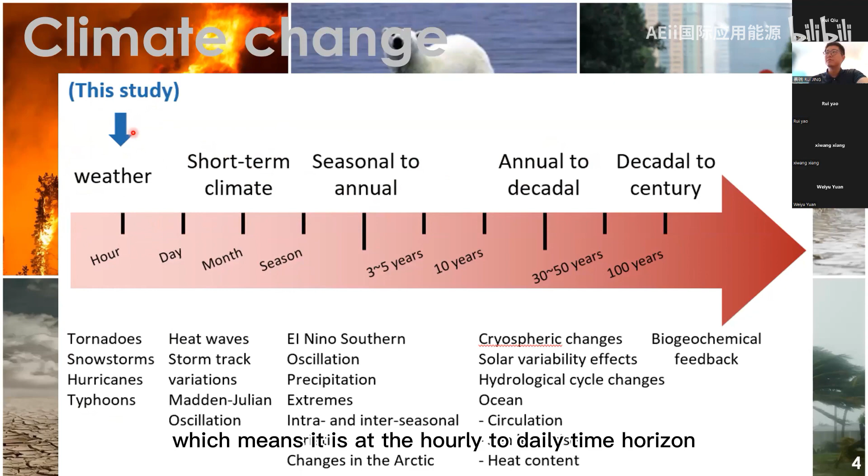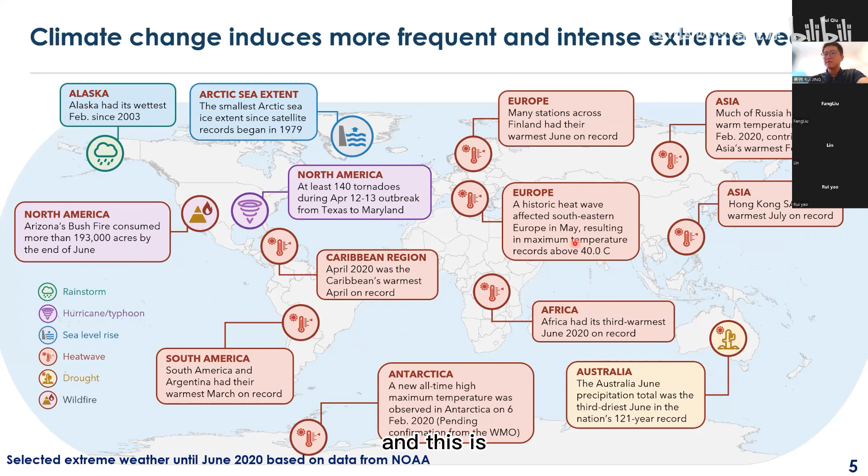Here is a map showing selected extreme weather events in 2020, such as the wildfires in America, hurricanes, the global record-breaking high temperatures, and also the drought in Australia, etc.

This informs us that we need to understand more and plan extreme weather resilient urban energy systems, as more weather-related renewable energy is now in our energy system. If we do not have sufficient knowledge of these events, the system or city operator can only hope that the next extreme weather will not trigger a sudden blackout.

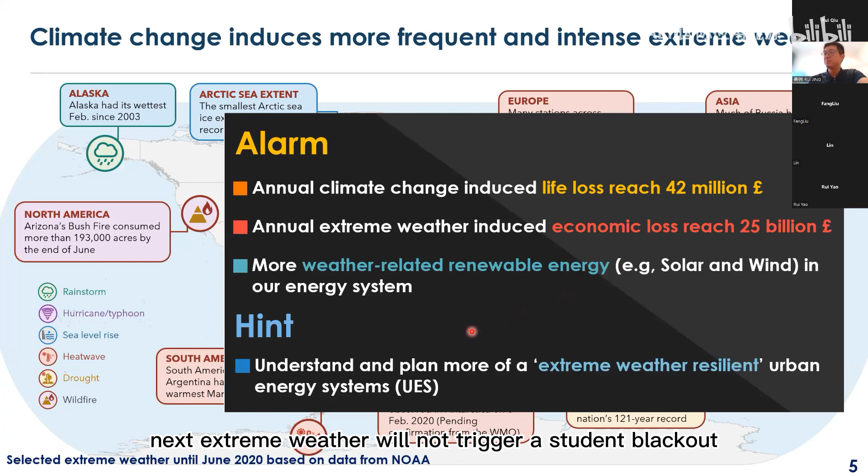Here we consider two types of extreme weather. One is called the grey rhino, such as solar and wind fluctuation. This type of abnormal event is one that decision makers are already aware of, and it is relatively predictable. People also call it a high probability but low impact event, and recent research already considers it quite well.

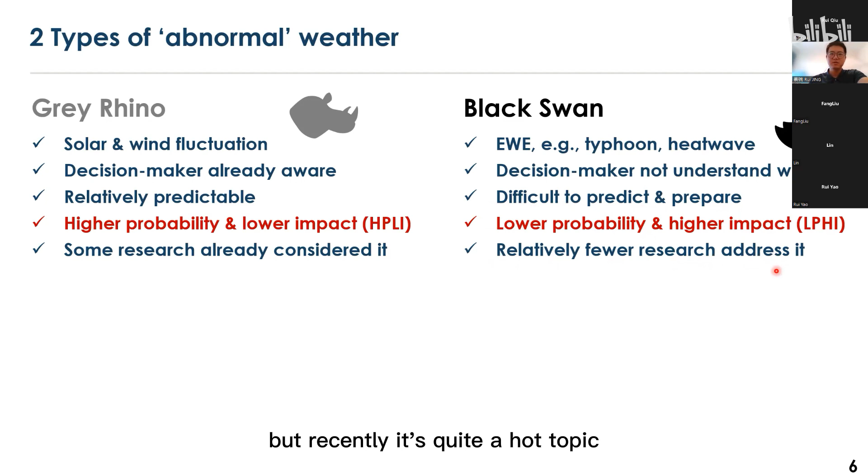Another type of abnormal event is called the black swan event, also known as an extreme weather event, such as typhoons or heat waves. Decision makers usually don't understand it well, and it is relatively difficult to predict or prepare for. People also call it a lower probability but high impact event, and there's relatively little research addressing it, but recently it's become quite a hot topic. So we mainly focus on this type of event in this study.

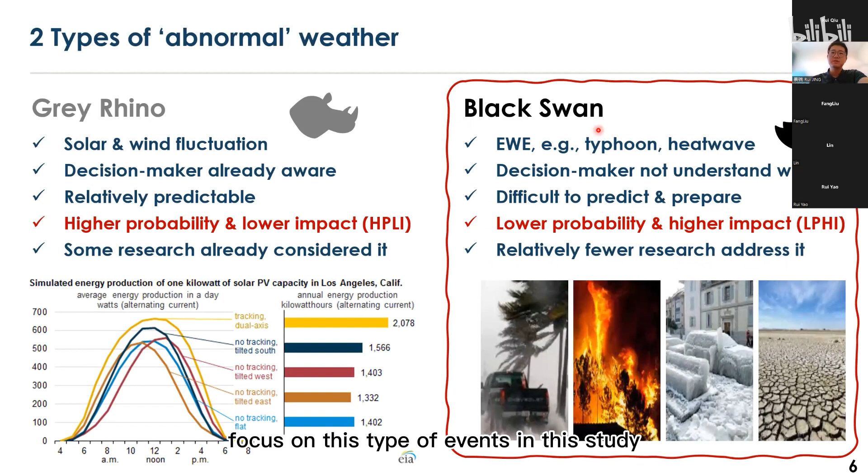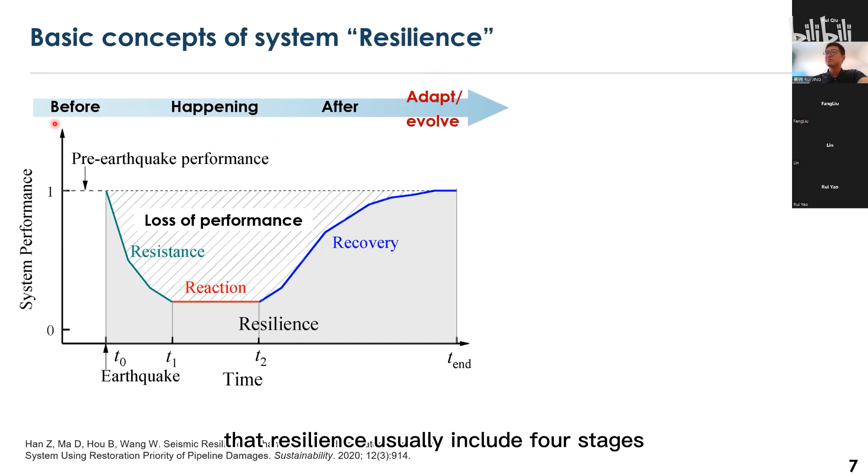Here is a basic concept of system resilience. We may already know the basic concepts of resilience, which usually includes four stages: before, happening, after, and even the adapt/evolve stage.

At the before stage, we usually perform planning and preparation research. When extreme weather happens, the system will absorb, react, and recover from the events. Since we're dealing with planning research, the system design can be changed based on the event, so the system can even adapt or evolve based on the events.

Resilience also has four attributes. The first is diversity, and it's easy to understand that a system with higher diversity is usually more resilient. Of course, a system with higher adaptability and flexibility is also more resilient.

But we need to know there's no free lunch here, which means a resilient system will usually require higher cost, such as spending more on backup power.

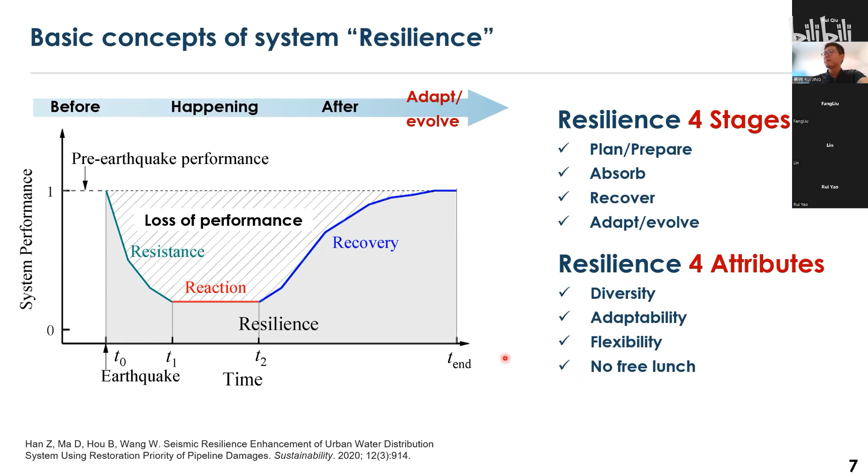For planning research, we mainly focus on expansion, design, and operation optimization research. The feature of it is that investment can happen per 5 years, per 1 year, or per 3 years.

We need to optimize the investment decisions, and we also consider operation decisions by simulating multiple typical days at hourly resolution. The objective function is usually to minimize the annual investment and operation cost. That is the planning research.

As for design research, it focuses on the design and operation problem. The investment is usually at the beginning of the project horizon. It also considers multiple typical days and hourly operation, and the objective function is usually to minimize the capital and operational cost.

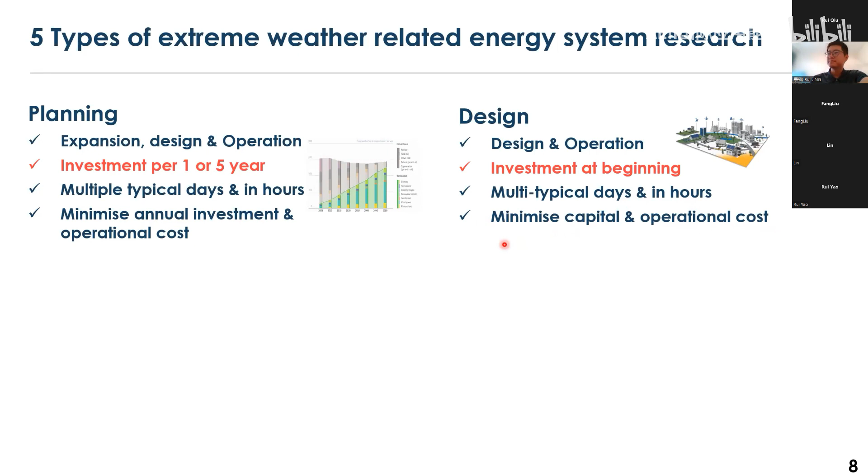So the slight difference between design research and planning research is in the investment stage. For design research, we usually only optimize the investment at the beginning, whereas in planning research, the system design may involve changes during the entire time horizon.

As for dispatch research, it focuses on frequency and voltage protection, and it usually simulates one typical day, considering even finer resolution, such as operation at minutes resolution. The objective is usually to maximize reliability.

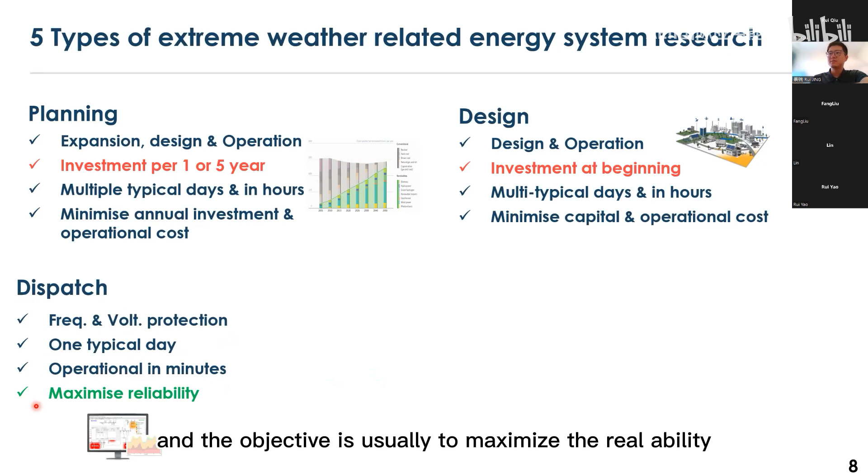The next type of research is restoration. It focuses on system reconfiguration and restart from black status. It also simulates one typical day and considers operation at minutes resolution, and the objective is usually to minimize recovery time.

The last kind of research is evaluation research. As we know, to assess resilience, only one index may not be enough, so it's important to develop an index system. Based on the index system, we usually need to consider multi-criteria evaluation and also optimization-based evaluation.

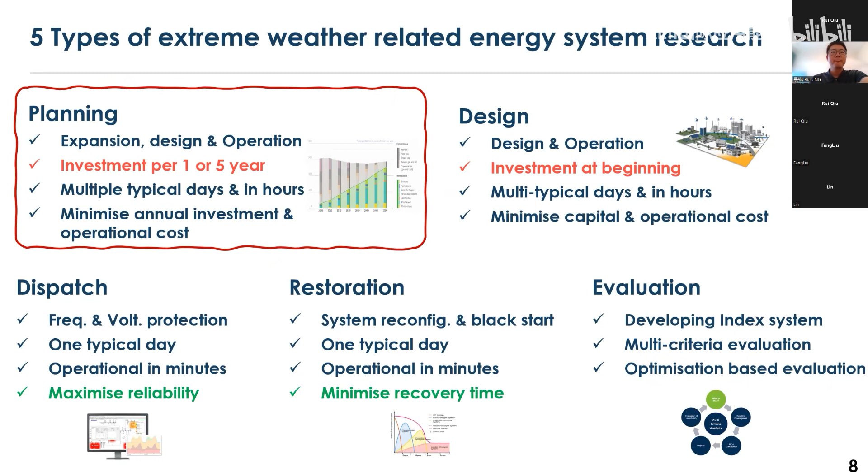So in this research, we only focus on the planning problem. We normally use a model to better understand urban energy planning, and a typical urban energy planning model usually has three parts: the inputs, the model, and the outputs.

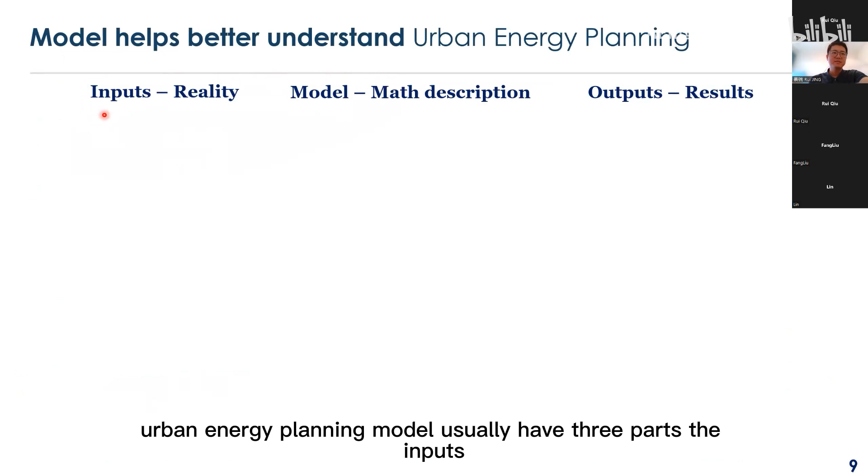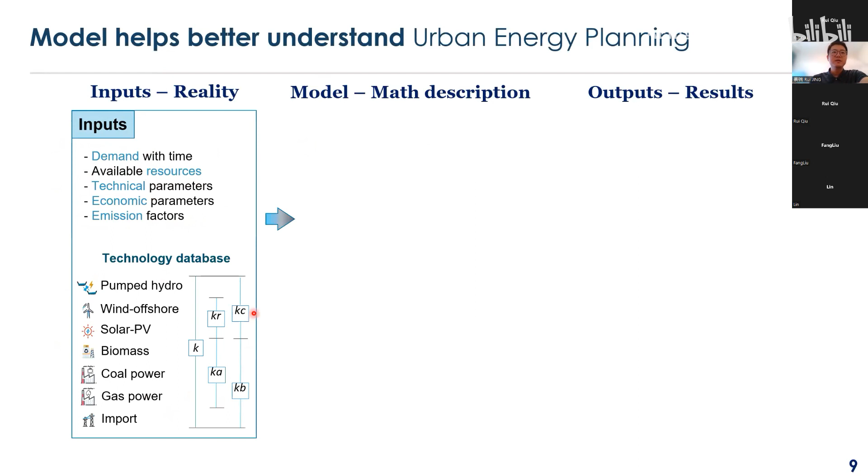In the inputs, we usually need to collect a lot of data, such as demand data, resource availability data, and also technical, economical, and emission data. We usually have a technology database, and then we develop the model.

The model usually has two elements: one is the objective function, the other is the model constraints, a series of model constraints. Then to build the model, we usually feed it to an optimization engine and get the optimal results from the optimization engine or solvers.

Then we can get the outputs. The outputs usually consider the annual energy portfolio, the dispatch strategy, the cost, and the emission. The dispatch is usually at hourly resolution, and the energy portfolio can be at per 1 year, 3 year, or 5 year resolution.

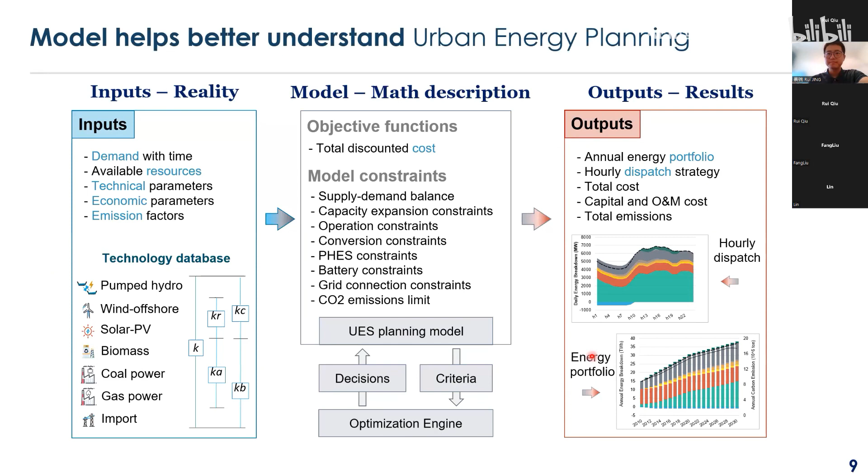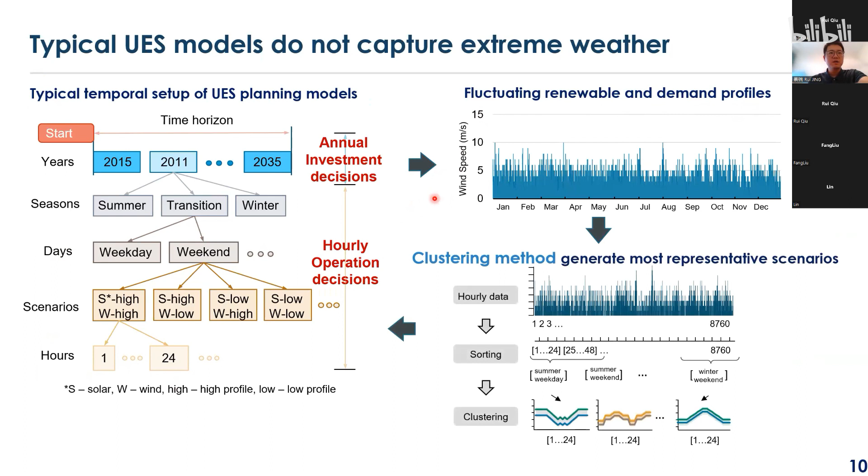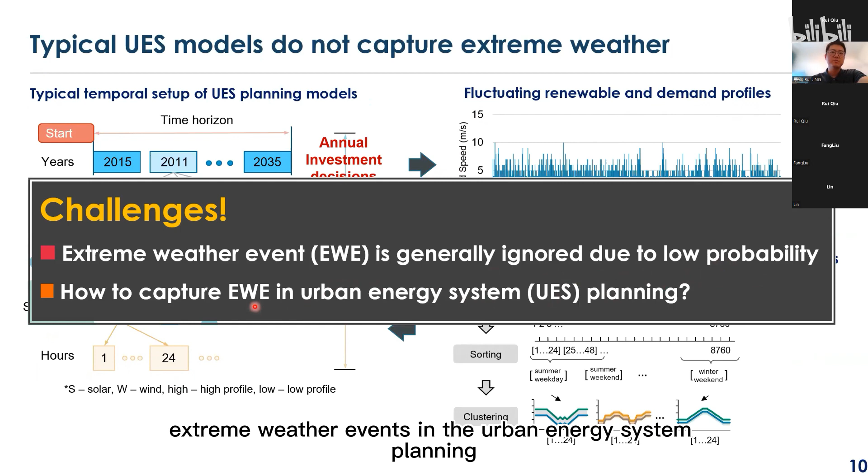As we know, renewable and demand profiles are always fluctuating, so we usually use clustering methods to generate the most representative scenarios. But for extreme weather events, it's quite easy to be ignored, as it has very low probability and high uncertainty. So how could we capture extreme weather events in urban energy system planning?

Here are two very good and representative research published in high impact journals. The first one is multi-energy design research considering fluctuating solar and wind. The highlight of it is it raised the importance issue of the low probability, high impact, and the high probability, low impact issue of extreme weather, and it performed a 30 cities case study.

The model it uses is a stochastic and robust mixed model, and we can further perform research based on it. The first part is it does not consider disruptive events, but only the low probability event. It also used identical temporal resolution and horizon for both extreme weather and conventional days, but as we know, extreme weather may fluctuate at finer resolution.

Another good research is electricity network planning research considering the hurricane. The highlight of it is it embedded the line failure probability into the model, and the model is a typical stochastic model. The limitation of using a stochastic model is that the future probability is somehow uncertain to predict. Another problem is that it also uses the identical temporal setup for both extreme weather and conventional days.

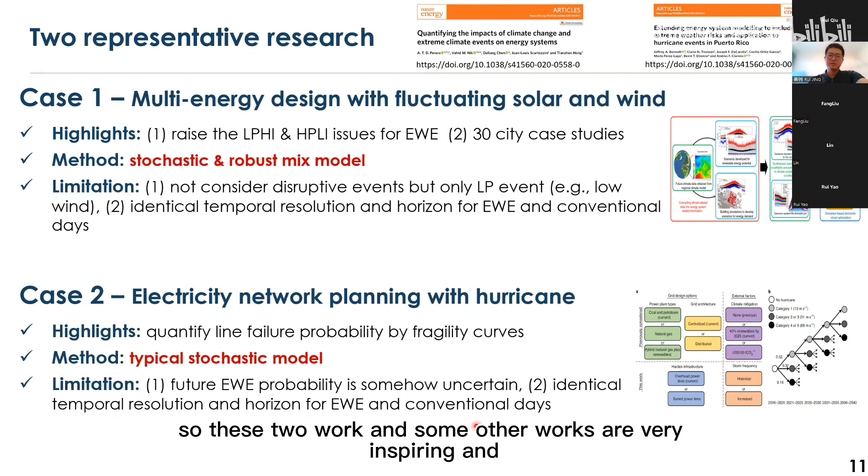So these two work and some other works are very inspiring, and they are a solid foundation for our research. So based on their research, we also try to develop models to consider extreme weather in urban energy planning, and we address this topic from two aspects: one is from the objective function, another is from the model constraints.

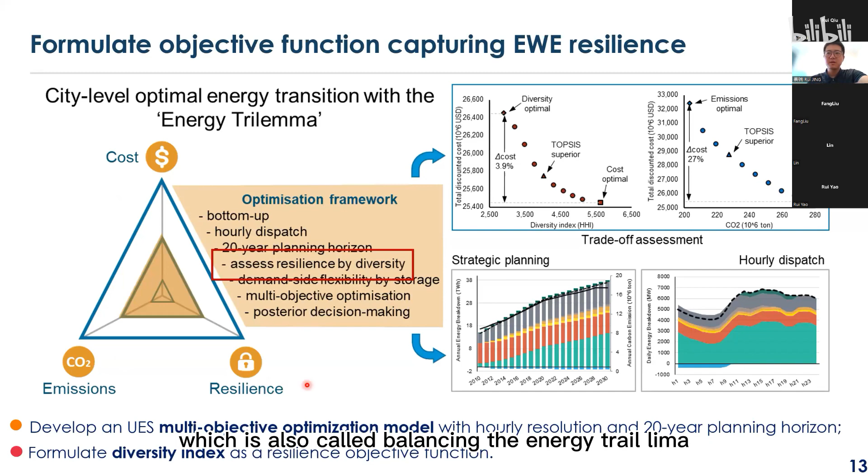So first, we try to formulate an objective function to capture the resilience problem. And we built a city-level optimization model. It is a bottom-up model. It considers the hourly dispatch, 20-year planning horizon, and we use the diversity index to assess the resilience, and also compare to the cost objective and emission objective, to assess the trade-off between the system design, considering three different objectives, which is also called balancing the energy trilemma.

So other than the emission and the cost, we introduce the diversity index to represent the resilience. The logic behind is that don't put all your eggs in one basket. So we try to find the most appropriate diversity index, but we can only find the HHI, which is the simplest one, but it is also a non-linear one. So it made the problem, the model, very difficult to solve.

So we further develop an initial value assignment heuristic to try to speed up the solving process of this nonlinear multi-objective optimization problem. The basic concept of this heuristic is that we use the optimal results from one solution as the starting point to solve the next point. But it is noteworthy that even though the speed could be partially sped up, I have to say it's not a good idea to build a nonlinear model for this scale of problem.

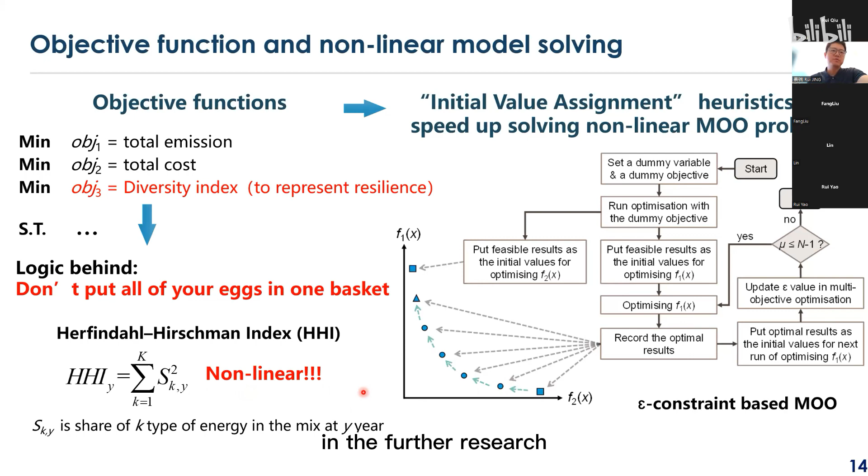So we try to avoid the nonlinear models in further research. We then use a case study to show the significant trade-off between different objectives. As we can see, the diversity optimal solution, the cost optimal solution, and the emission optimal solution here, and the extra 3.9% cost can achieve a diversity optimal solution compared to the cost optimal.

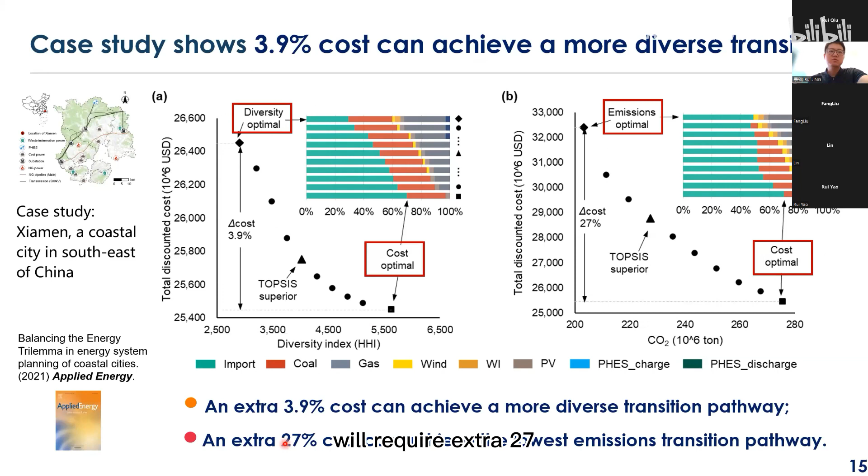And we also use cost optimal as a benchmark. Then the emission optimal will require extra 27% cost.

Then we further try to build models to capture extreme weather. Firstly, we built a typical stochastic model for that. So in a typical stochastic planning model, in each year, we will build a scenario tree to capture the difference of seasons, different days, and regular scenario and the typhoon scenario as a benchmark.

But it's quite challenging to quantify the probability of each scenario, but it is the key to build a stochastic planning model. So for the typhoon scenarios here, we have to use the historical weather data, but we do not consider the future change of the weather.

So based on that, we further propose the original two-layer modeling framework, and we try to avoid a too complex model. So we divided the entire problem into 2 stages.

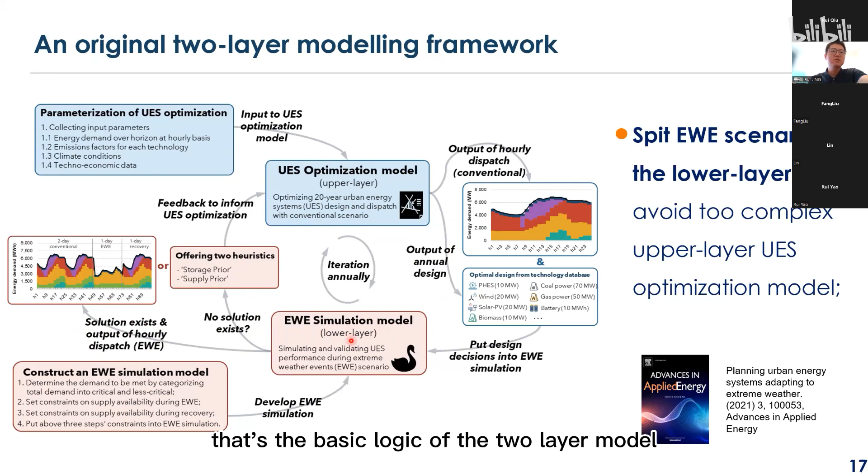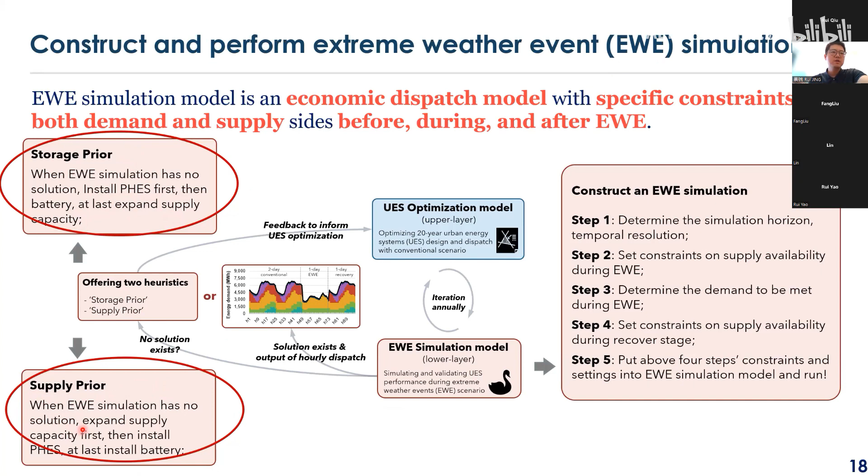Another heuristic is the supply prior, which means that if there's no solution exist, we tend to expand the supply capacity first, such as the gas power capacity first, and then install the pump hydro storage, and at last install the battery.

The advantage of such a 2-layer framework is the high flexibility, as it avoids a too complex upper layer optimization model, and then it allows the 2-layer framework and the lower layer simulation model to capture the extreme weather. So the upper layer only needs to consider the conventional scenario.

And at last, the iteration is also flexible. We can choose annual iteration, or per 3 years or per 5 years, both are okay, depending on the needs.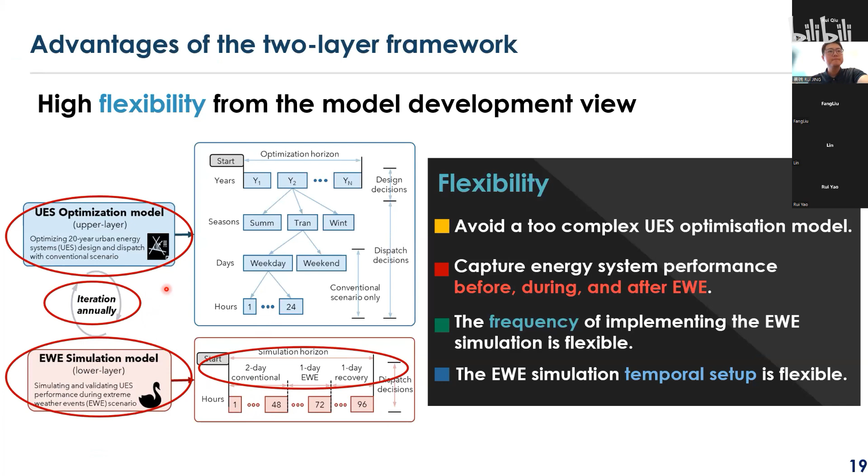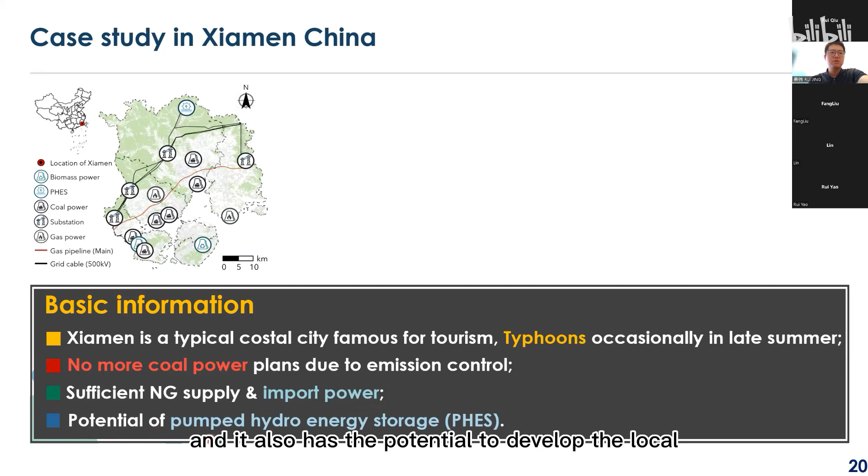So we also use a case study in Xiamen because it is located on the southeast coast of China, and it has typhoons occasionally. There is some basic information for planning Xiamen's energy system, such as: there are no more coal power plants due to the emission control strategy, the local area has sufficient natural gas supply, and it has sufficient import power supply from the Fujian province utility grid. It also has the potential to develop local pumped hydro energy storage.

In this case study, we consider 3 scenarios. The first scenario is the benchmark, which means we don't consider the extreme weather, so there's no extra cost. In scenario 2, we consider the extreme weather using the storage prior heuristic, and the result shows that 2.8% extra cost is needed. For scenario 3, we apply the supply prior heuristic, and it will cost an extra 5.4% to fulfill the energy demand when the extreme weather happens.

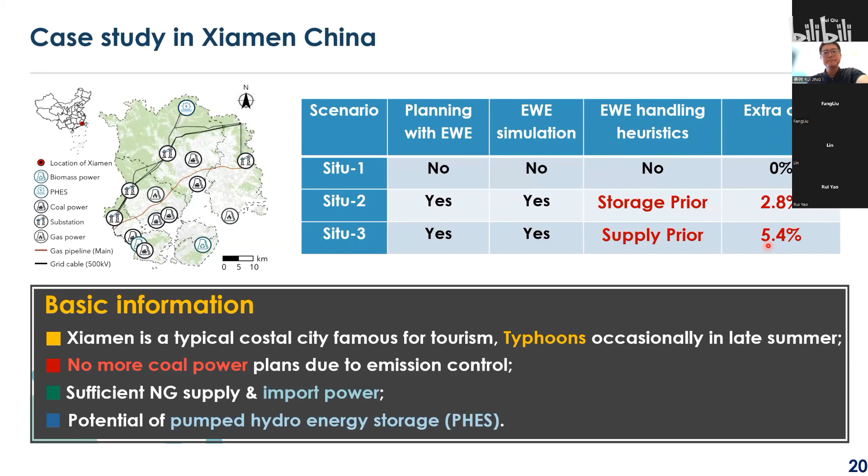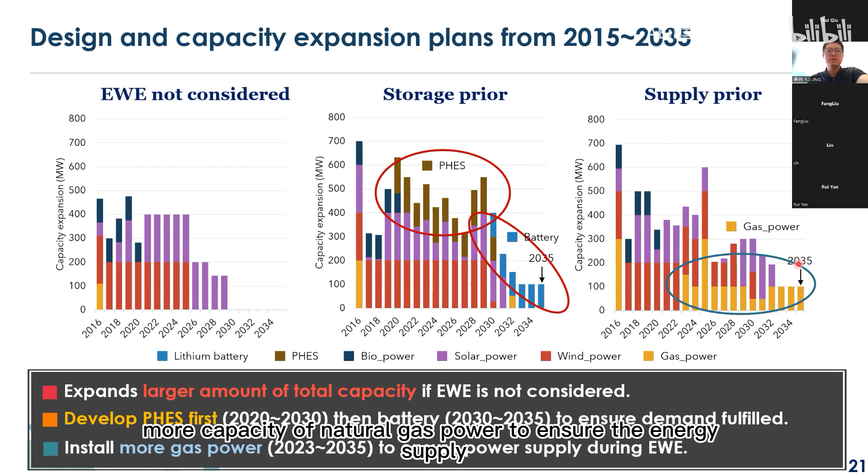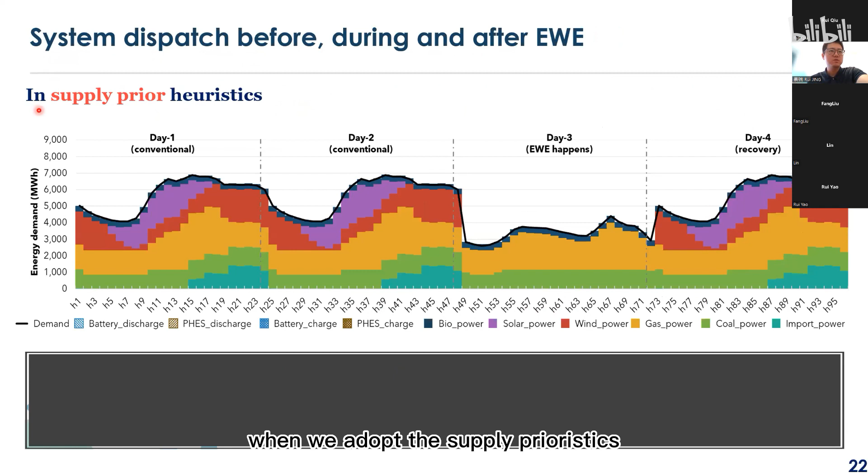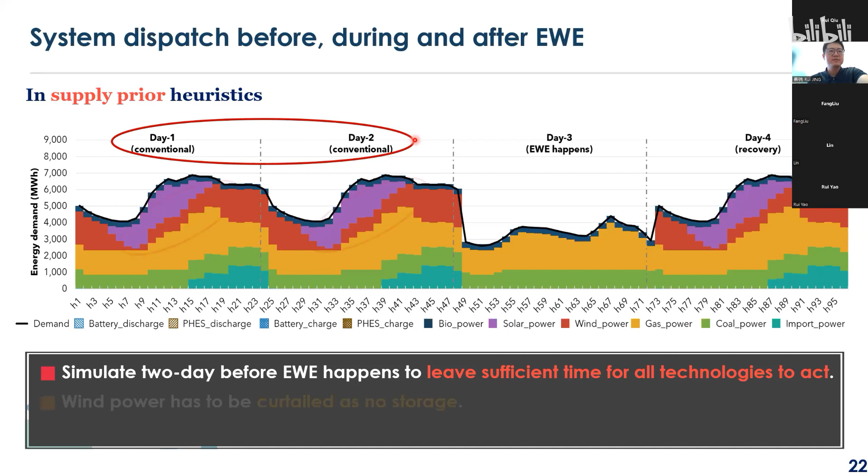Here is the system dispatch before, during, and after extreme weather when we adopt the supply prior heuristic. We intentionally model 2 days before the event to allow sufficient time for all technologies to act. In the supply prior heuristic scenario, since there's no storage, the renewable power has to be curtailed.

When the extreme weather happens, the demand will drop to a lower level. For example, we consider only the essential demand here. And the gas power is flexible to ensure the energy supply.

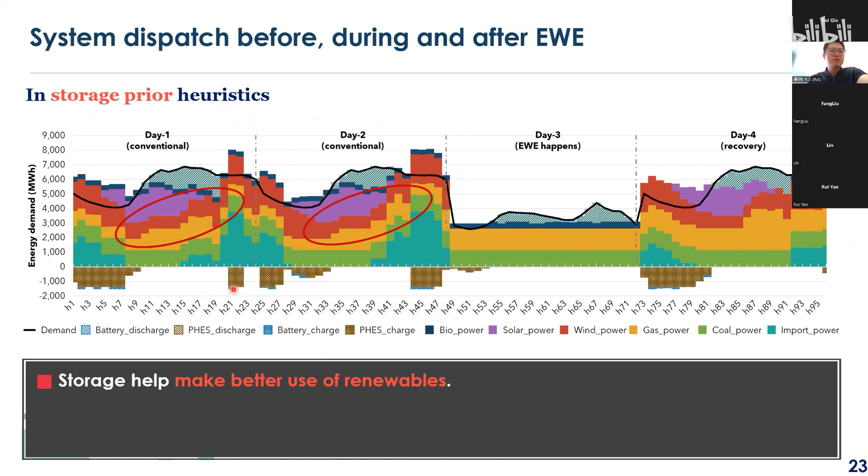When the storage prior heuristic is adopted, we can see that since storage exists, it helps to better use renewables during the daytime. When extreme weather happens, the storage can also help cover the peak, and the coal and gas power can cover the basic demand.

We also consider a recovery day. In this case, we just assume all the technologies can immediately recover after the event, but this can be altered based on specific demands.

So let's now discuss the case study and the findings from our methods.

Resilience is quite an open question, and it becomes increasingly important as climate change indeed brings more intense and frequent extreme weather, such as the heavy rain for 3 weeks happening in my location, Xiamen, at the moment, and the freezing cold and snow for the first time in Xiamen, such a warm city, at the beginning of this year. So resilience is indeed an interesting topic and deserves more investigation.

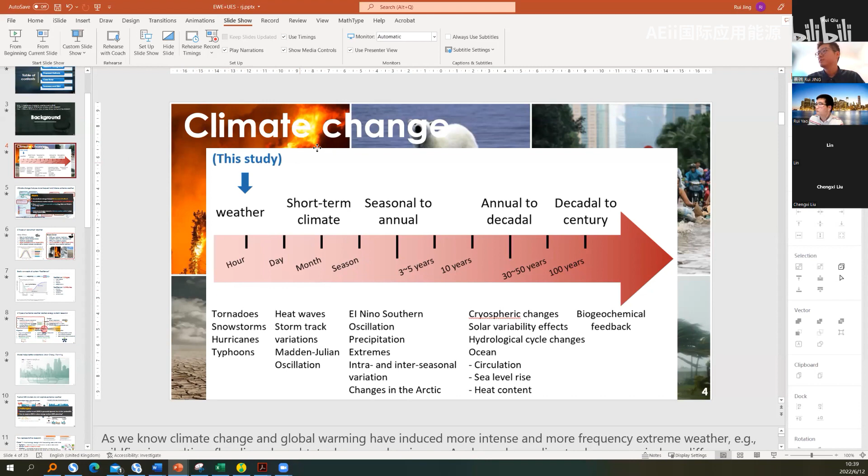There's no definition for extreme weather, considering that climate change is evolving. So usually we consider events such as wildfire, drought, flooding, and hurricane or typhoon, depending on the time resolution of it. Here we consider the hourly to daily resolution events as extreme weather.

And the question, sorry, let's go back to it. Oh, okay, I see the question. Yeah, the question was posted on the chat. You can see that, yeah. I think...

To decide the scenario, first we need to decide which kind of extreme weather we need to address, which is what I explained before. The next question is to quantify the probability of it. At the moment, I use historical data, and I haven't considered how future climate change induces changes in probability, but that's a quite interesting question that deserves further investigation. So basically two steps: one is to determine which extreme weather you want to assess, and the next is to measure its probability. That's my answer, thank you.

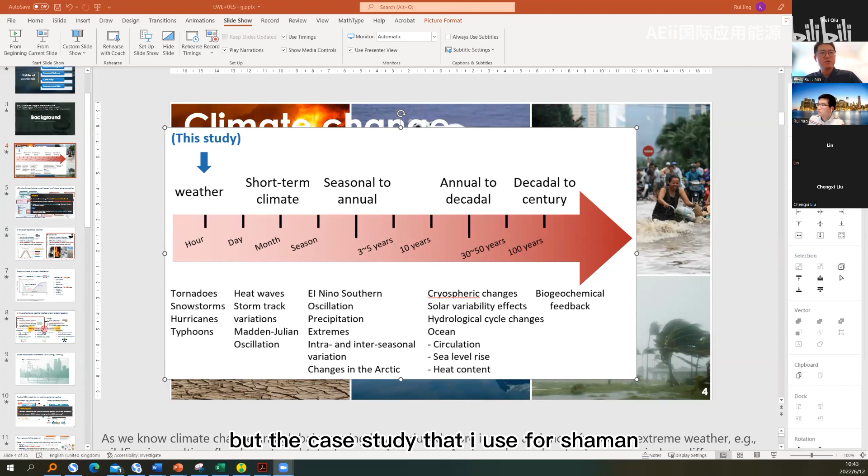As for real implementation, I'm sorry, at the moment I don't have any real implementation. But the case study that I used for Xiamen uses real data, and I compared the simulation data with the real world data, and it makes sense. So the case study itself makes sense, but I don't have a real implementation at the moment. That's my answer, thank you.

Actually, I have a little bit to follow up. So I see that your two-stage, or two-level, framework—the upper level is for optimization, and the lower level is for simulation. And...

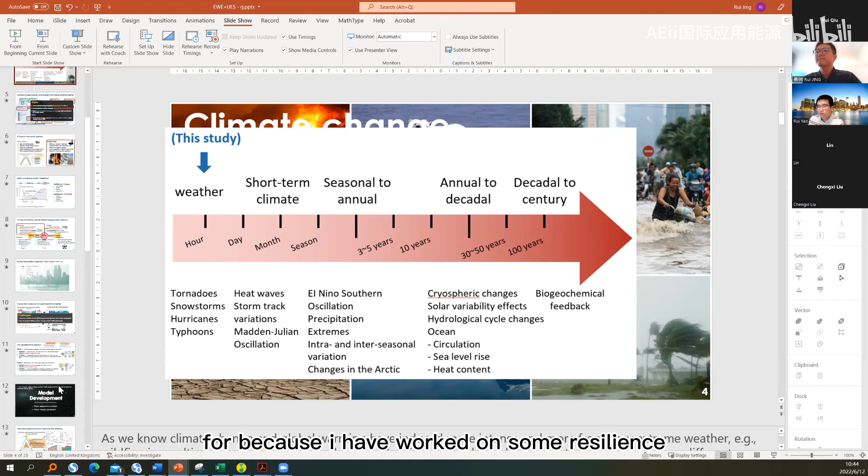Because I have worked on some resilience modeling and simulation work, there are actually a lot of existing resilience modeling and simulation works, and pretty good simulators available. Maybe each of them focuses more on one factor—they are really good at simulating details for maybe some scenarios. So is your framework compatible with these existing simulators? For example, if you want to leverage those existing simulators, can you put them into your framework?

To be honest, I didn't compare them, and I think you are raising a very important question, so I have to compare my model with others. I think what I try to propose here is more about a concept of splitting the problem into two stages. So of course we can embed a very well-developed simulator at the lower stage and combine it with another planning model at the upper layer. So it's more about the concept of splitting problems, and it's not limited to a specific model at the lower layer.

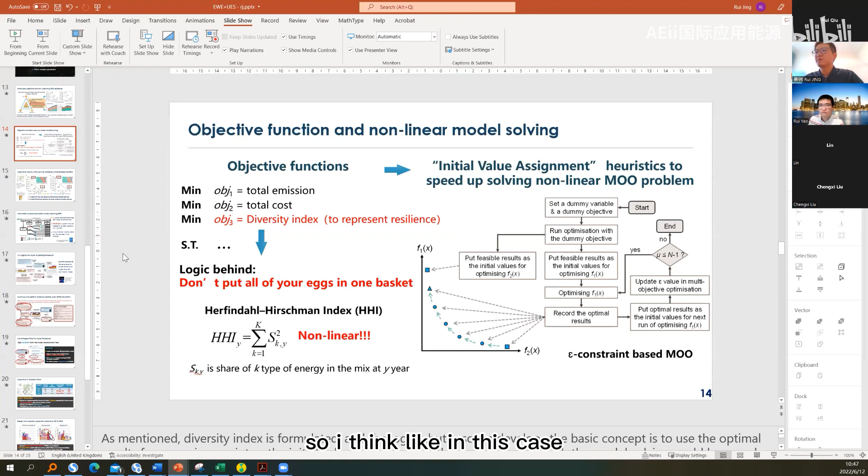So like I do here, I use the diversity index, but I found actually it's not a very good one, as it generates a nonlinear problem. So in this case, essentially I converted the unmet demand into the cost by the value of lost load, and I think that would be a quite good one. But to be honest, it is still a developing question. The general answer is that it's not easy to quantify it, and we need to have an index system.

So for the next question, about the extreme weather being low probability, high impact, and what's the impact on multi-energy system design and operation?

I think you already mentioned the answer - that the impact is both on the supply side, which is decrease the capacity, and also the demand side, which may induce some demand increase and some demand drop. And the impact on the design and the operation.

My first impression is that since now the energy system have been heavily penetrated by weather-related renewables, in a multi-energy system, when we try to handle these LPHI events, we may still need to have sufficient solid and safe supply, such as the gas power supply.

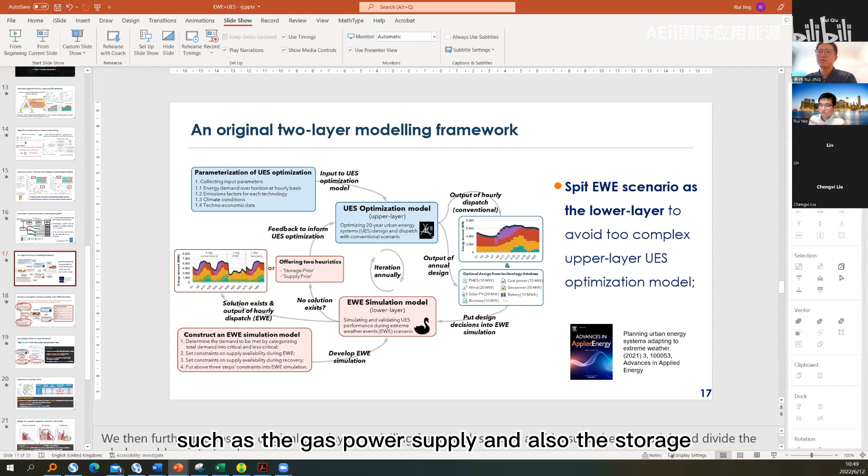And also the storage - storage can play an important role during extreme weather. And also the demand side management, such as demand response, and using electrical vehicles as mobile storage devices are also important measures. I think to handle LPHI events in a multi-energy system, it will require a whole system model to consider both the supply side and demand side, all the measures together.

And it will be a quite interesting optimization problem. That's my answer for the second question.

And the last one is, any solutions to enhance the energy resilience? I think there are lots of things we can do, but it really depends on what kinds of events we are facing. For example, typhoon events could be totally different from drought events.

So based on the energy DOE, they have two principles for how to enhance the energy resilience of an energy system. One is to invest more on the physical infrastructure, and another is to change the system operation strategy so as to address the resilience problem. So they offer two kinds of principles, but in detail, we need to address the detailed solution depending on the events we're facing.

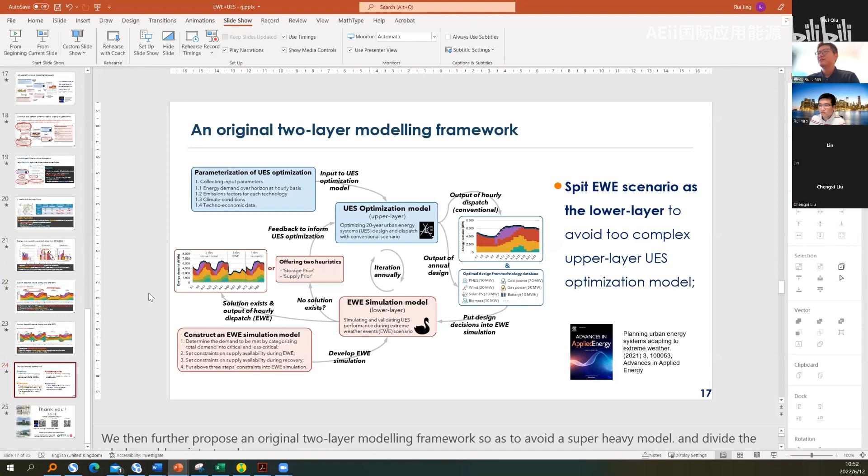Yeah, that's a good question, and it also goes along with what I was showing here - the prediction is quite a challenging problem. I also have this challenge when I do the research, and so far I think we need to

have more interdisciplinary research that combines the climate and weather-related researchers' results with our energy research. I think in the climate change research field, they already have done a lot of very good research to predict the future weather data, in a very long time span, such as up to 100 years later.

And when we try to use their data, we have to consider how it can be combined with our energy system model, and what kind of data that we need in our model. For example, I think the time resolution is always a big problem.

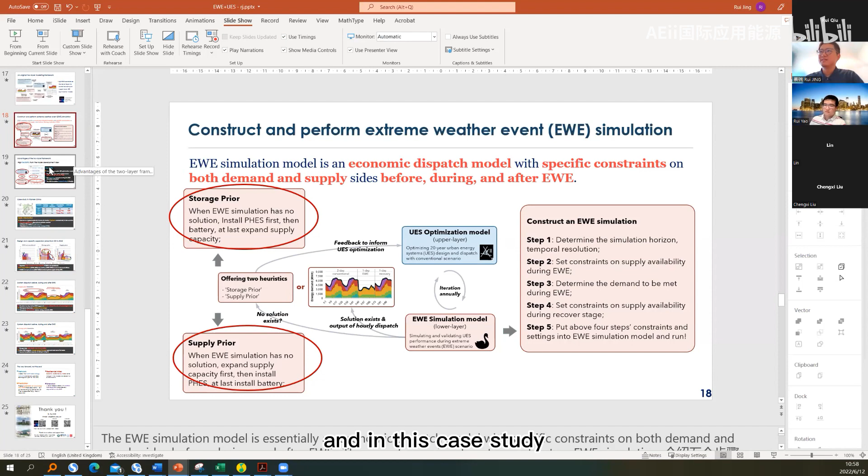That's a really good question. In this case study, I didn't consider a 2-day extreme weather event, but since I split the problem into 2 layers, the lower layer model is quite flexible—you can set how many days you want. That's what I try to highlight: the advantage of this concept is more flexible than putting everything into one model. Also, the lower layer model's simulation horizon and resolution are not limited to the entire planning model. That's why I think my 2-layer framework is good.

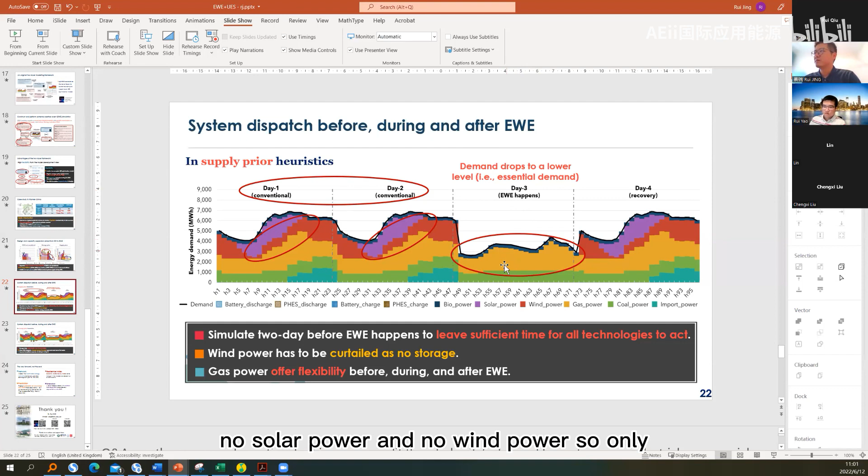Okay, so when the extreme event happens, I assume when the typhoon happens, there's no solar power and no wind power. So only traditional power such as gas and coal still work, and also the storage if they exist. Also the city becomes more isolated, so there's no imported power from the wider utility grid as well. So here, it's only gas, coal, and a little bit of biomass.